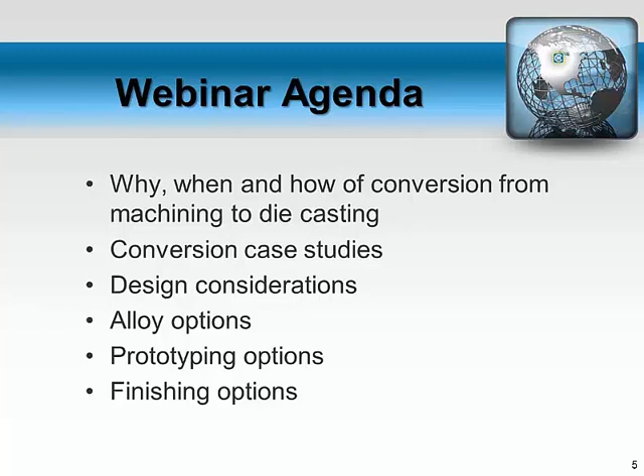We'll look at some design considerations to take into account. When you change from CNC to die cast, there's obviously some things that need to be done differently from a design standpoint. We'll look at a few of those. We'll talk about some of the alloy options available for die casting and ways to compare that to the CNC alloys out there. We'll look at some prototyping options for die casting, as well as some finishing options.

So why should somebody convert from a CNC part to a die cast? It really comes down to money. The biggest reason is to try to save on part price. What typically happens, and what we've seen many times in the past, is a customer will come to us. They have a new project that was started maybe a year or a couple years ago. At the time, maybe they needed 10, 20, 50, 100 parts at one time, and it didn't make sense to do it as a die casting initially. So rightfully so, you start with a CNC or machined part as a way to produce it.

And then a year or a couple years from when it started, you look up and you're buying 500, maybe 1,000, getting into higher volume quantities, and you realize I'm spending a ton of money on a CNC part. The guy that owns the CNC shop just picked me up yesterday for lunch in his new Bentley. I think maybe we should look for a better cost-effective way to produce it. So die casting is a great option, and that's what we're going to talk about.

Reduced part delivery lead time: the die cast process runs very quickly once the part is tooled and in production, so you can definitely cut down on your lead times. Part-to-part consistency: again, once the part is hard tooled and in production, you will get very repeatable parts coming out of the tool. Optimized part features: one of the big advantages is being able to optimize what gets put into the hard tooling. You want to take advantage of as much as you can ahead of time, get as many features and advantages for you as you can ahead of actually tooling up a die casting. So definitely consider what all you want and what makes sense for your project.

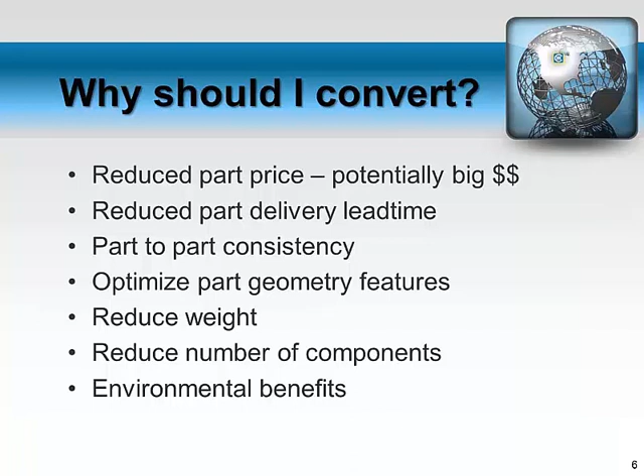So when should you convert? First is when design is stable. If you've been in production for a couple of years and realize your part isn't really changing, it's been very stable, the project is stable, it's a great time to look at converting.

If there's still things in flux, the part changes every now and then, maybe it's not a great time to convert yet. When volume has increased or is expected to increase, that's the biggest reason to do this, if the volumes are there to justify paying for a die-cast tool and can save money.

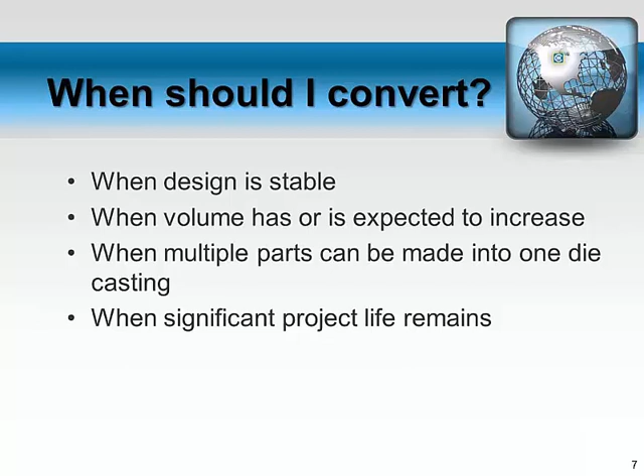As mentioned, when multiple parts can be converted into one single die casting, and when there's enough project life remaining that it makes sense. If the project's going to end 3 months from now, it probably doesn't make sense to convert to a die casting.

When should I not convert? Volume is just too low to justify the die cast tooling payback. We'll look at an economic example in a minute — you can see how it's not rocket science, where the break-even points are and how long the tool payback period is. If it doesn't make sense, it doesn't make sense.

Again, design is not stable — that's another factor. If the die-cast alloy is not suitable for the application, there are definitely differences between most alloys used for CNC or hog-outs versus what you'll see in a die casting. We'll provide material specifications for the most common die-cast alloys, so it's easy to compare the characteristics you're looking for to see if it makes sense to convert.

If dimensional tolerances are too tight, and the product after it comes out of a die-cast mold still needs to be machined a great amount because of tight tolerances, the payback may not be as quick, and economically it doesn't make sense. That's another factor.

And the porosity issue — all die castings have some amount of internal porosity. If for some reason your application requires zero porosity, then maybe conversion to die casting is not the right way.

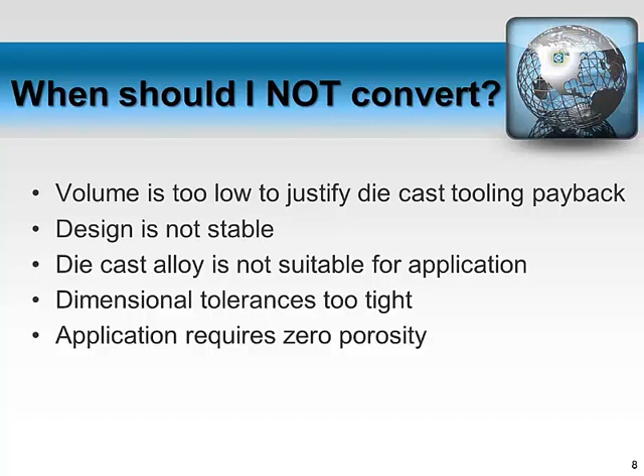So how do I convert? Obviously, as the die caster, we would like to get involved as early as we can in a project, go through all the aspects of what you need, when you need it, the different features the part will see in its life, and help you as much as we can early on.

We have a number of design guides located on our website in the Design Center that will help start the process of converting from a CNC part to a die cast part. All the alloy information and that type of thing are on our website as well.

Our sales and engineering group is very ready and able to help if you want to send us a model or a concept and talk it over, either live in person or on a go-to meeting such as this. We can look at the project and give our input to you in real time.

In fact, our engineers at our facility can take a 3D file and do the conversion for you. There are a number of things that will need to be done to a model for a CNC part in order to convert it.

We're more than willing and capable of doing those changes for you. Chicago White Metal also uses another tool called the MAGMASOFT Flow Simulation that aids with our design.

And lastly, have confidence. Chicago White Metal has been in business for just over 75 years, have done many conversion type projects, and we have confidence we can help you too.

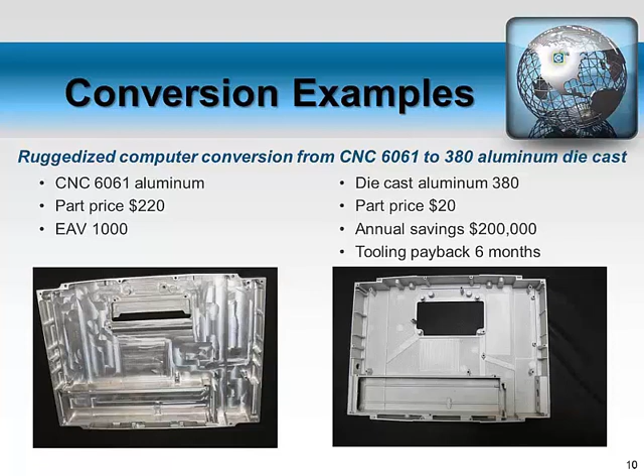This next example is what I alluded to earlier about taking a multiple part assembly down to a single die casting. The picture on your right is the final product, but you can imagine all the threaded features on here were individual screw machine brass parts that were welded or somehow assembled to an aluminum body. When our customer came to us we said, hey, you could potentially make this as a single piece part. We decided to do a Zamak alloy for this application for strength and other reasons, and we were able to do it as one part. All the OD threads on this part are as-cast, so it's already in the tool. There's no post-machining required, and we were able to get a huge cost savings for this customer.

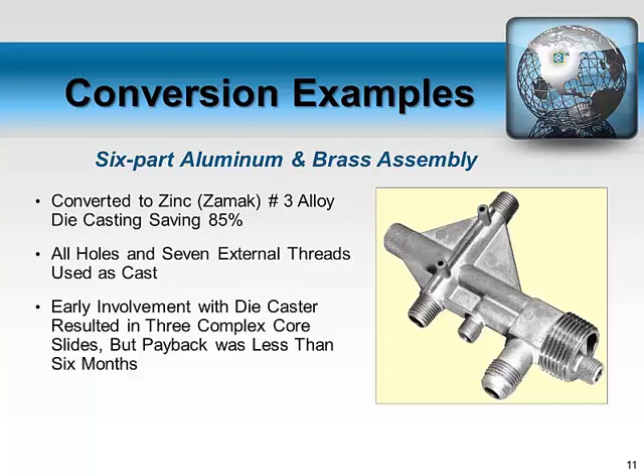This next example used the miniature zinc die casting process. These were very small screw machine brass parts that were converted to a zinc die casting. The individual part pricing savings was significant as a percentage of the CNC or screw machine version, but not a huge amount per part - we're talking 12 to 16 cents for each individual part. So this type of project would need a higher volume to justify tooling it up, but usually small parts like this have higher volume. In this case we were able to save about $85,000 a year for this customer once these two parts were converted.

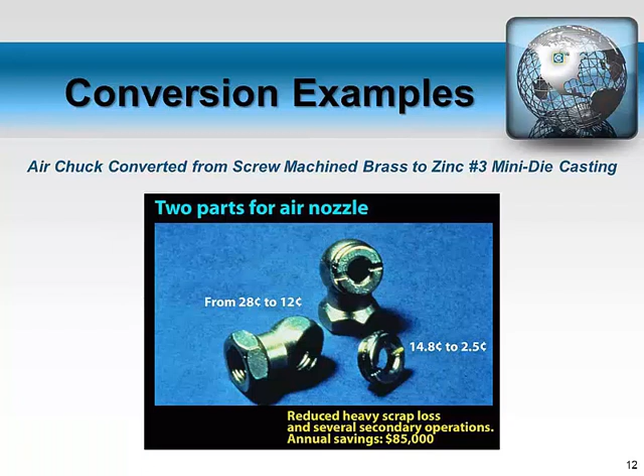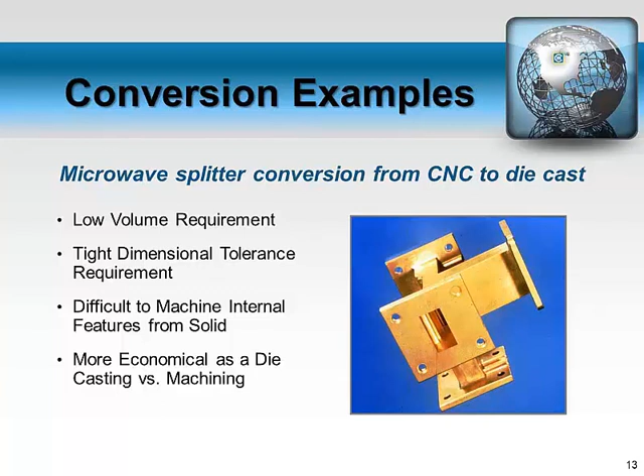So let's look at some design considerations. As I mentioned, converting from CNC to die cast, you're going to have to do some things a little bit different. You saw on that first case study, the big chassis part, some of the overall features that would have to change. We didn't focus on it much there, but we'll look at some of the individual features here.

Relatively consistent wall thicknesses is a thing to consider when looking at die casting. Die castings don't have to have 100% consistent wall thickness around the part, but it definitely helps when thinking about how the metal will flow in a part and how the part comes out of the tool.

Eliminate undercuts - we'll show that in a minute - where some features that you can easily machine in, if it creates an undercut with the way the tool forms a cavity or a certain feature, that's a problem. So care needs to be taken to eliminate those as much as we can. Add draft, ribbing, radii, and weight savers - things we've talked about to some extent, but we'll show examples of.

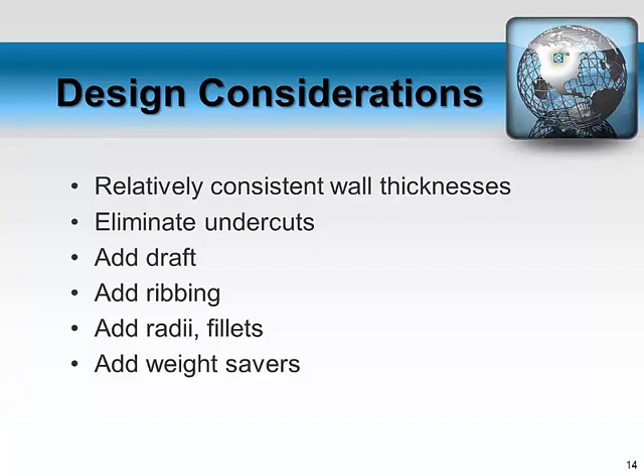The things that improves include better metal flow through that area. You can imagine as liquid metal flows through that section, instead of having to fill a large, thick, solid area and taking longer to cool, it now flows similar to the rest of the part, in the same type of wall sections.

The reduced amount of weight means added cost savings, just from less material cost going into the part. Cycle time is also improved because there's less mass, so you can speed up your cycle, and there's less chance for porosity. The big thick sections tend to give a better chance of internal porosity, so if you minimize those thick areas, you minimize porosity.

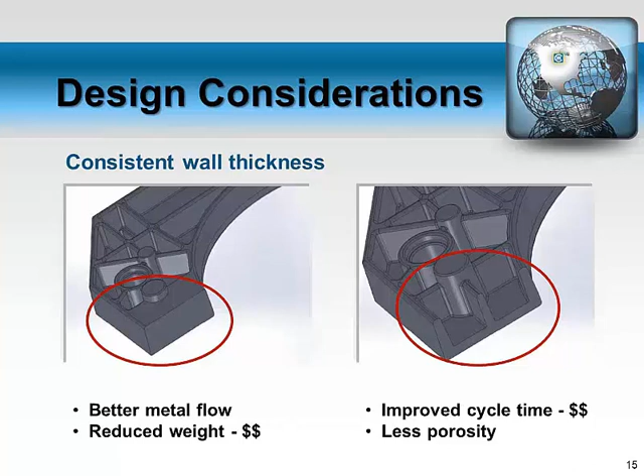So one of the things we had to consider was how do we remove that undercut while still keeping the functionality of the part, but have straight wall sections going down through those walls to eliminate it. That's another thing to consider if you have a feature like that on your CNC part.

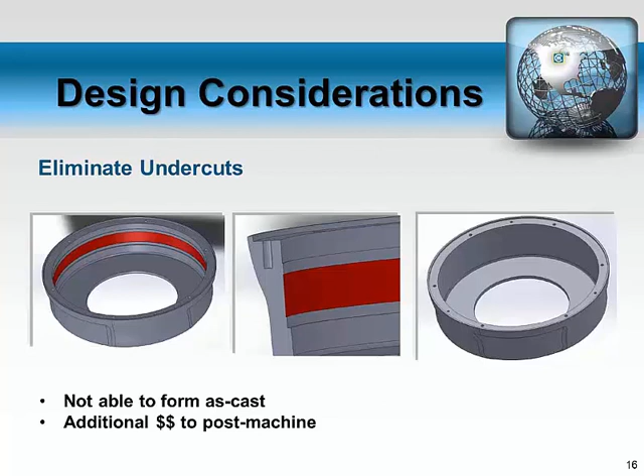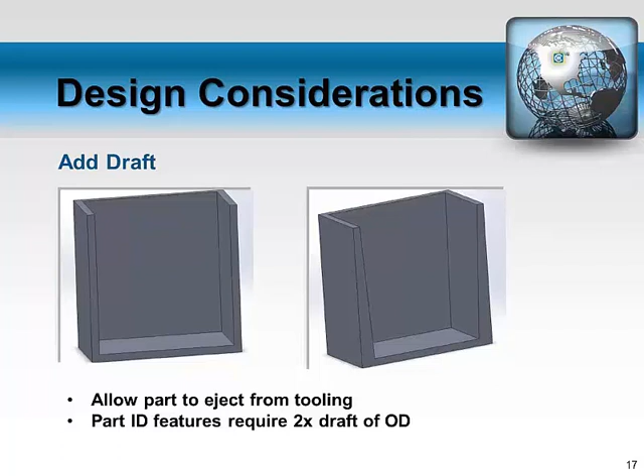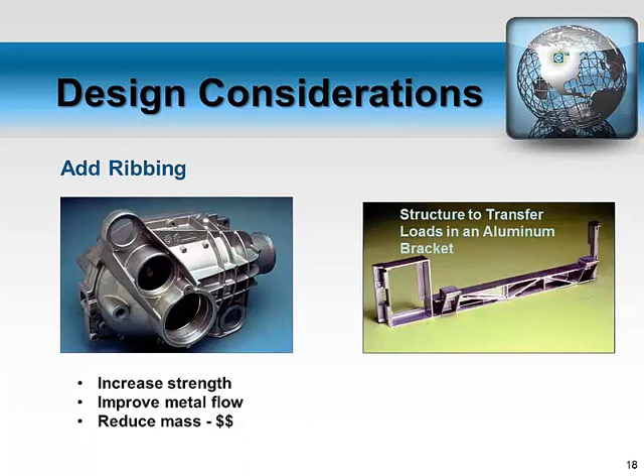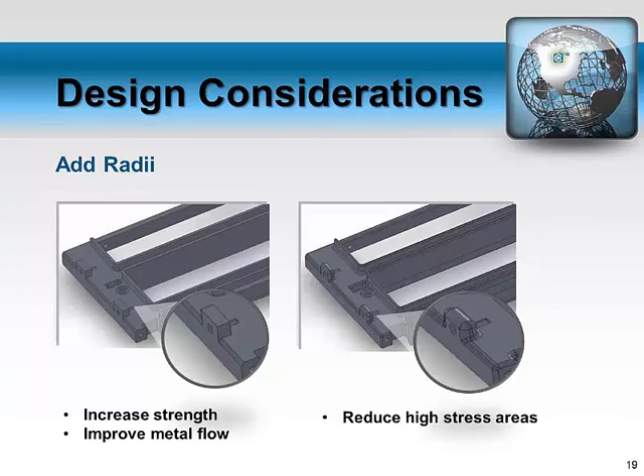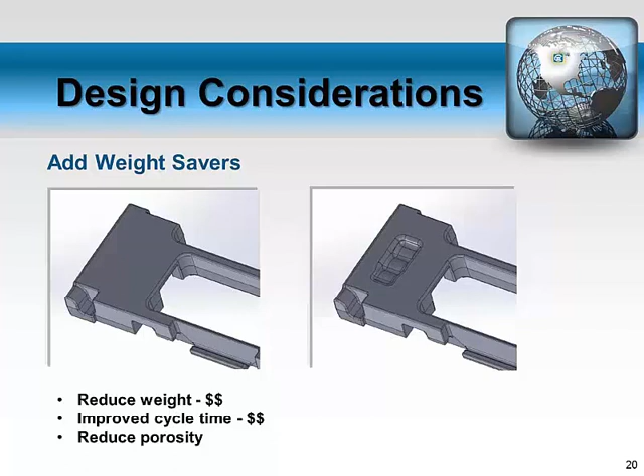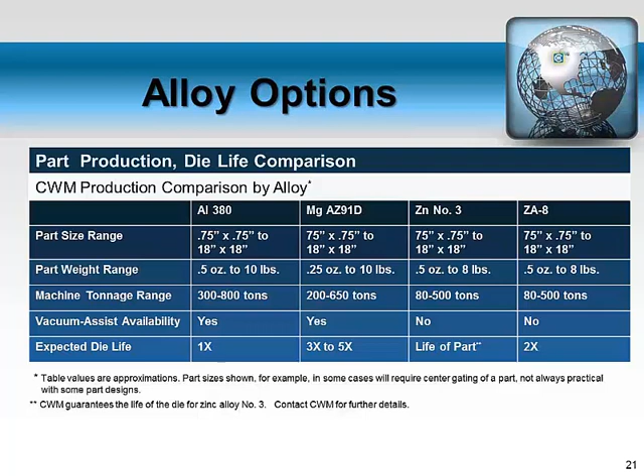There's another chart, which I don't have in here, of the material specifications. You can see exactly how 380 aluminum compares to 6061 or other typical billet materials and alloys that you'll use in a CNC, so you can see exactly how the strengths compare and the various physical properties you're trying to achieve.

For prototype options, there are a number of options to look at for die castings. The first one is a single cavity hard tool, basically the same H13 steel, tool steel that we use in the normal production tool. We can do maybe a single cavity version of that to get you a very real-life prototype. Some projects require the exact type of part you're going to be making in production to prototype and test with, so that's an option.

Another option is doing a single cavity soft tool. Potentially, depending on the type of part, size, and that type of thing, we'd be able to offer a P20 or other less hard tool steel to create a die and run a limited number of parts off of. It won't get you thousands of parts, but it will get you enough to have a very good representation of what will be done in production and be able to test with.

Rubber plaster molding is another great option for prototyping these type of parts. Not something Chicago White Metal does in-house, but we have a number of partners that we recommend for doing this process. It's similar to investment casting, with relatively low tooling expense, a little higher part price than what you'll see from a production die cast part, but it's a great option for getting a very close representation of how the part will physically and materially be in production.

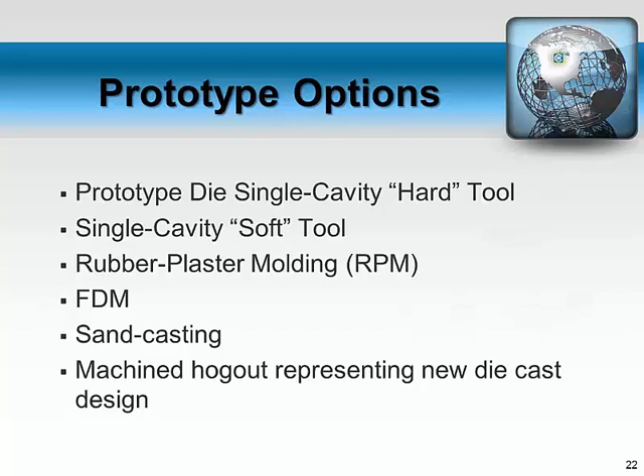The post-casting operations, I'm not going to focus a lot on these. This was a big topic of the second webinar we did, so I invite you to go back and revisit that on our website if you'd like, as well as check out the handouts and guides we have there for the various post-casting options.

But needless to say, there are a number of things that can be done after the part is physically die-cast. You can do deburring, additional machining if there are tolerances or features that aren't able to be die-cast in, dozens of coating and plating options, wet and powder coat painting, as well as graphics from pad printing or silk screening. Mechanical assembly - if there are mechanical components that make sense to come in as part of the die casting, we can do that for you. Again, there are a number of guides on our DC2 section of our website to review.